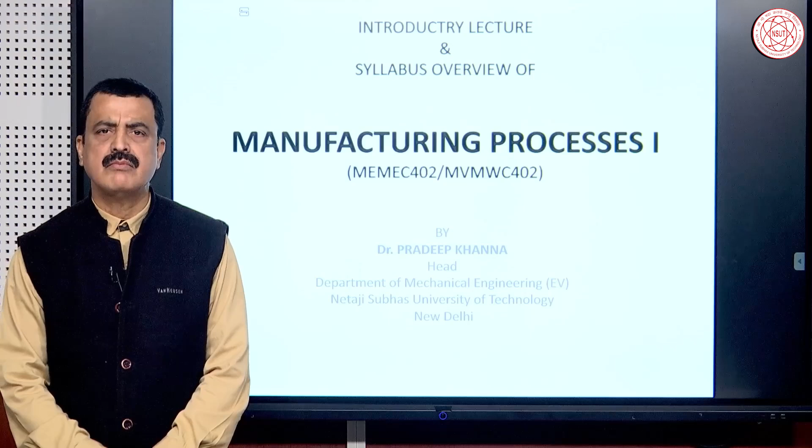But the present syllabus of Manufacturing Processes 1 is focused around these 2 major categories to keep the content relevant and within practical limits from the viewpoint of its effective coverage. So let's have a look at the syllabus structure.

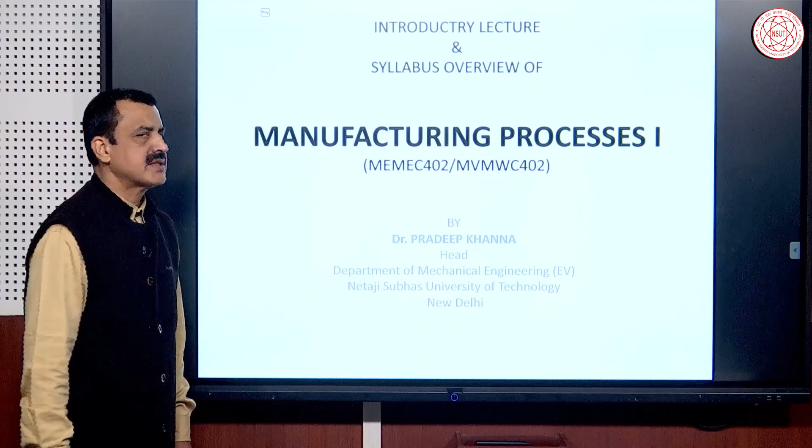So we are discussing Manufacturing Processes 1, which has the codes MEMEC 402 for the students of mechanical engineering and MVMWC 402 for the students of mechanical engineering with specialization in electric vehicles. Now, as far as the course structure goes, we have manufacturing processes, which is divided chiefly into, as discussed, shaping operations and assembly operations.

Shaping operations are those where a desired shape is given to a starting material by a number of operations. These operations are further categorized as casting, powder metallurgy, deformation, and material removal.

Casting refers to a process where molten metal is poured into a mold of desired shape. After solidification of this molten metal, the desired shape is taken out either by opening or breaking the mold.

Then we have powder metallurgy, where the desired shape is given by using fine metal powders which are compressed under very high pressure into a desired mold made up of metal. Then it is given a suitable thermal treatment to achieve the desired shape with sufficient strength and other mechanical properties.

Then we have deformation, where the starting material is plastically deformed to give the desired shape. This can be done either in the cold stage or hot stage, so it is further categorized as cold working or hot working. A very common example is forging.

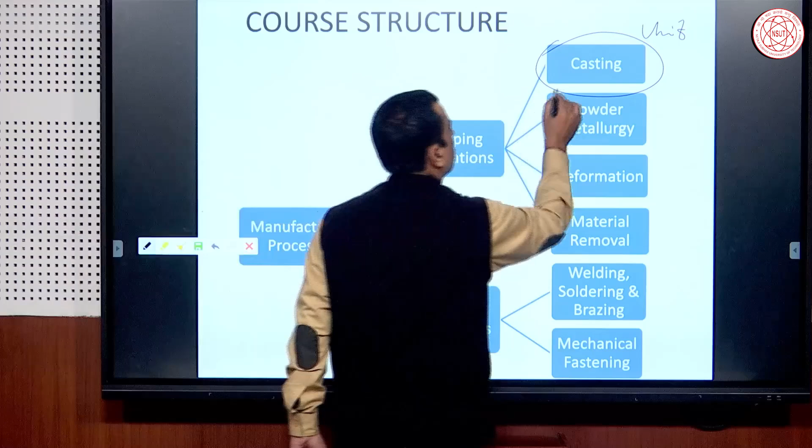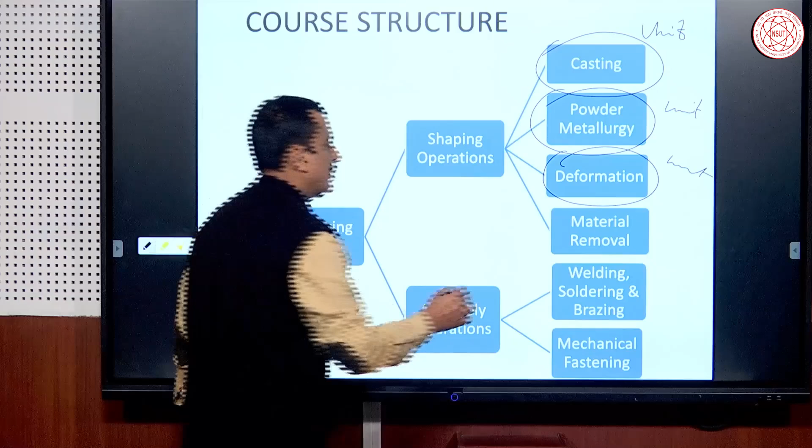Powder metallurgy is another unit. Plastic deformation processes is another unit. Welding, soldering and brazing is another unit, and mechanical fastening, of course. So we have units 1, 2, 3, 4 covering these topics separately, and the 5th unit is on engineering materials.

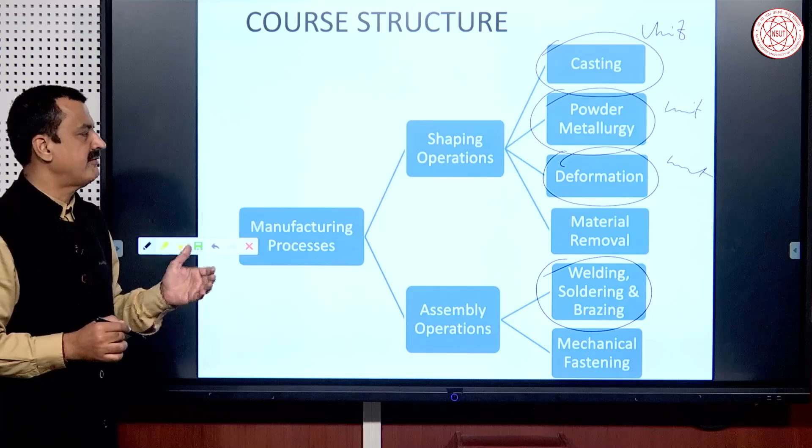The 5th unit is on engineering materials. In fact, unit 1 is engineering materials, unit 2 is casting, unit 3 is powder metallurgy, unit 4 is plastic deformation, and unit 5 is dedicated to welding, soldering and brazing.

The first unit is dedicated to engineering materials, which is rightly so, because the choice of manufacturing process and the process parameters to be selected to make a particular product will depend upon the material out of which the product is to be made. Also, the mechanical properties of the final product depend upon the type of manufacturing process used. So either way, knowledge of engineering materials is necessary and beneficial to students.

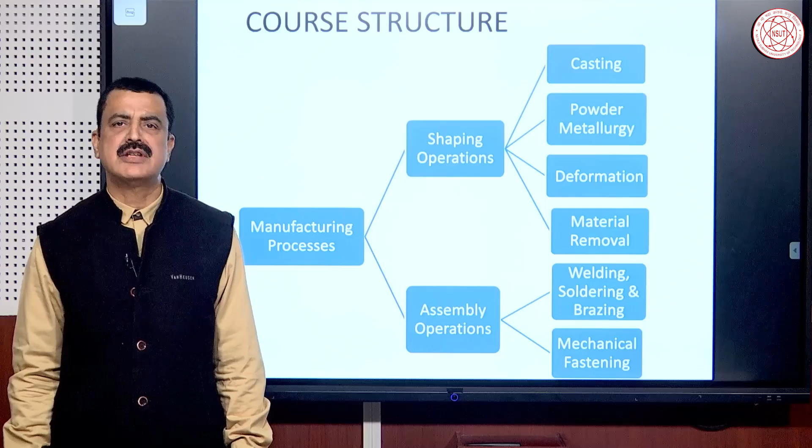The engineering materials are classified into metals, ceramics, polymers and composites. But in the present course, the emphasis is on metals and alloys. These can be divided into two basic groups, namely ferrous materials, which are based on iron, and non-ferrous materials. So unit 1 is dedicated to engineering materials, where we give an overview of ferrous and non-ferrous materials.

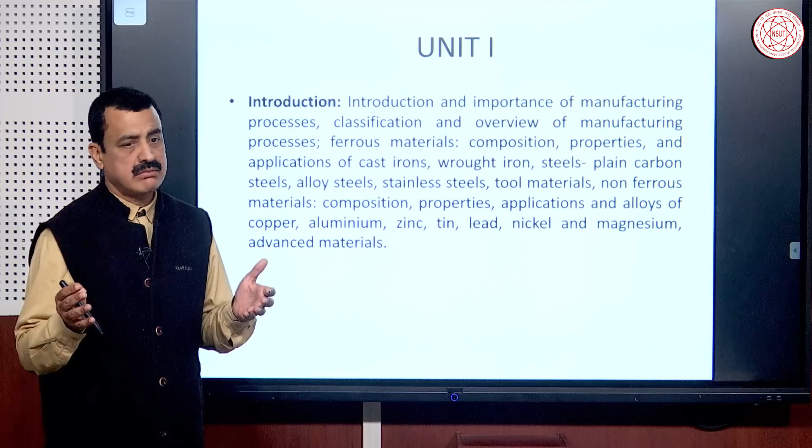In ferrous materials, we'll go through the composition, properties and applications of plain carbon steels, alloy steels, cast irons, stainless steels, and some special steels like tool materials. In non-ferrous materials, we'll discuss the metals and alloys of copper, aluminum, tin, nickel, lead, etc. The aim is to introduce these materials which are very commonly used in general engineering applications.

Now unit 2 is dedicated to casting processes. Casting, as I have already defined, is a process where molten metal is poured into a mold of desired shape, from where after solidification the desired product is taken out.

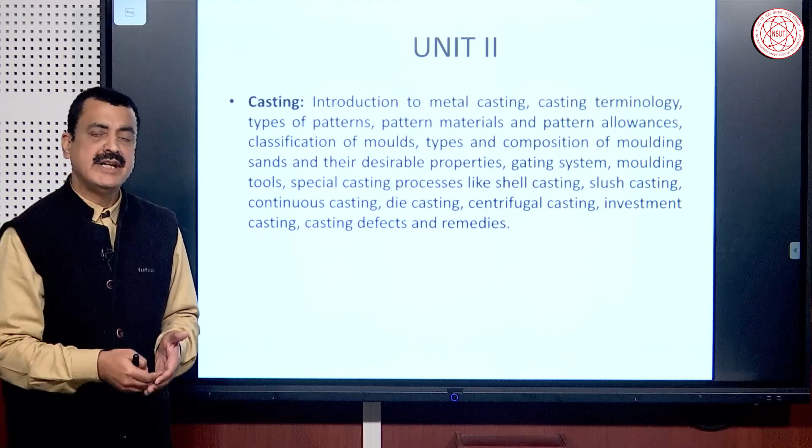Now in this unit, the emphasis is on the types of casting processes. We have broadly divided into sand casting and permanent metal mold casting. Sand castings are those where the mold is created in sand, molding sand. Molding sand plays a very important role because its properties affect the kind of casting and its quality. So we'll study the types of molding sands, its composition, properties and effect on the casting produced.

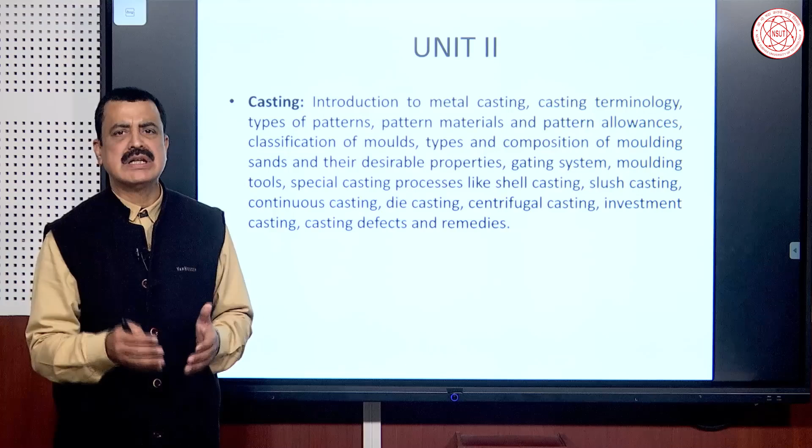Then we'll deal with permanent mold casting, which covers gravity die casting, pressure die casting, low pressure die casting, high pressure die casting, and some special casting processes like investment casting, centrifugal casting, etc. Finally, we'll discuss casting defects and their remedies, which is a very important aspect of castings.

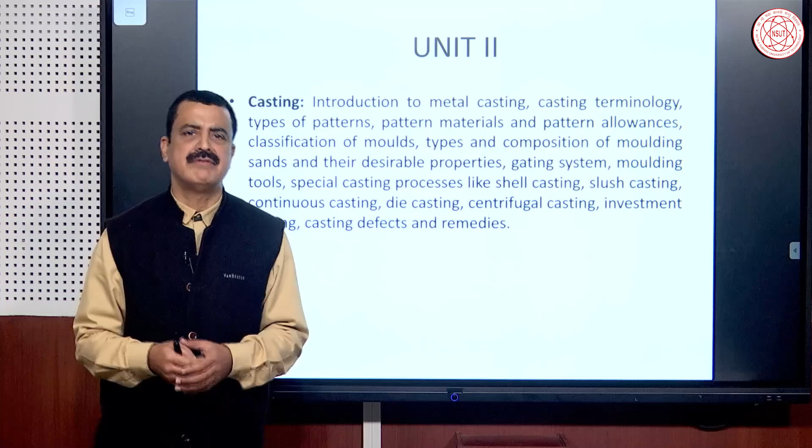Next, unit number 3 is dedicated to metal joining. Here, metal joining means we'll be discussing welding, soldering and brazing.

Welding, as you know, is a process where the metals to be joined are melted at the interface and joined. In this chapter, we will discuss different types of welding processes based on their heat source, like gas welding, arc welding, and solid state welding.

We will go into details of gas welding, the types of flames, the properties of different flames and their applications. Then we go to arc welding processes, where we shall discuss shielded metal arc welding, MIG welding, etc. We will also cover welding consumables, dealing with the types of electrodes and other consumables used while welding.

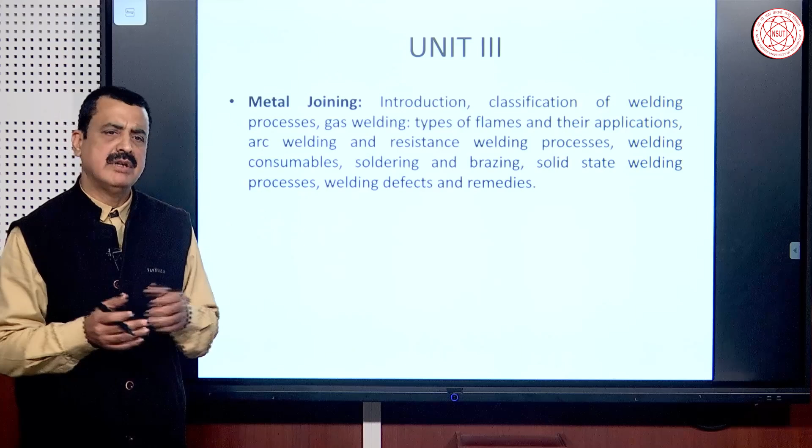Then we will discuss solid state welding, one of the important solid state welding processes being friction stir welding. Finally, we will deal with welding defects and their remedies. So this was unit 3.

Unit 4 is about powder metallurgy. Powder metallurgy, as we discussed, is where fine metal powders are processed by first compressing them into the desired mold and then heating them to a certain temperature so that they acquire the desired properties.

In this case, we shall be discussing the complete process of powder metallurgy, their applications, and their comparison with conventionally produced products.

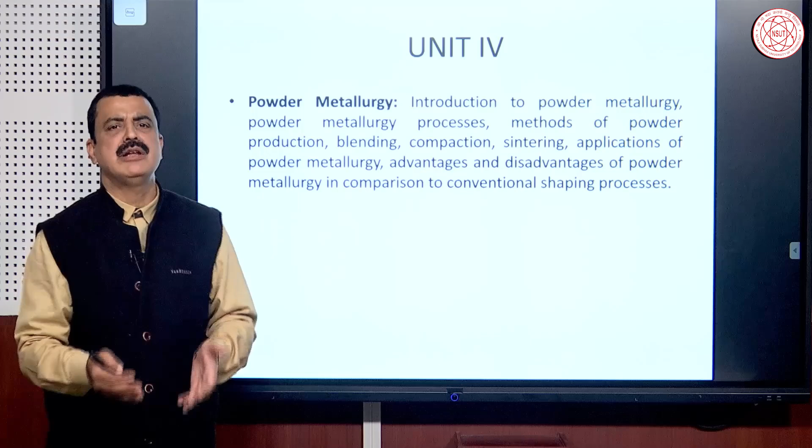Unit 5 is dedicated to the plastic deformation processes, which include rolling, extrusion, forging, etc., where we will be discussing the cold working processes and hot working processes.

Then we have sheet metal work. Sheet metal work is where we deal with metal sheets and the different tools used to give different shapes and make different types of joints with metal sheets of a specific thickness.

Then we have bench work and fitting. This involves the use of hand tools in giving different shapes to the starting material by removing excess material. Remember, this has to be done using hand tools. Here we will look at processes like sawing, chipping, scraping, and thread cutting, both internal and external.

Remember, these two topics are covered in your class workshop practicals also.

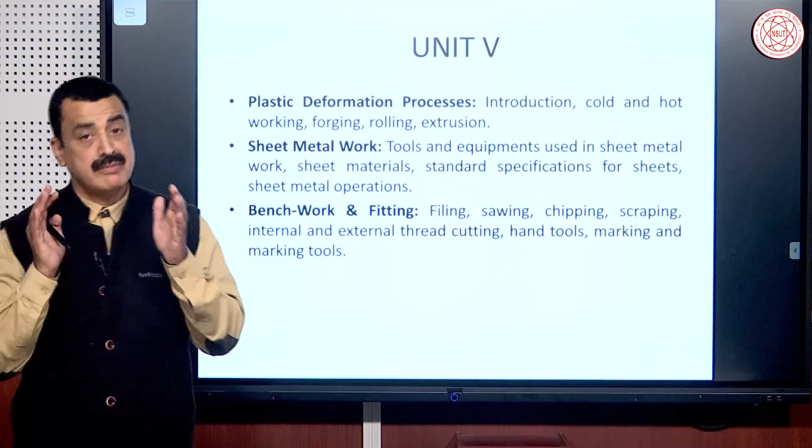These are some of the suggested readings, five suggested readings: first, second and fourth. These three cover comprehensively the manufacturing process 1 and manufacturing processes 2, both of them.

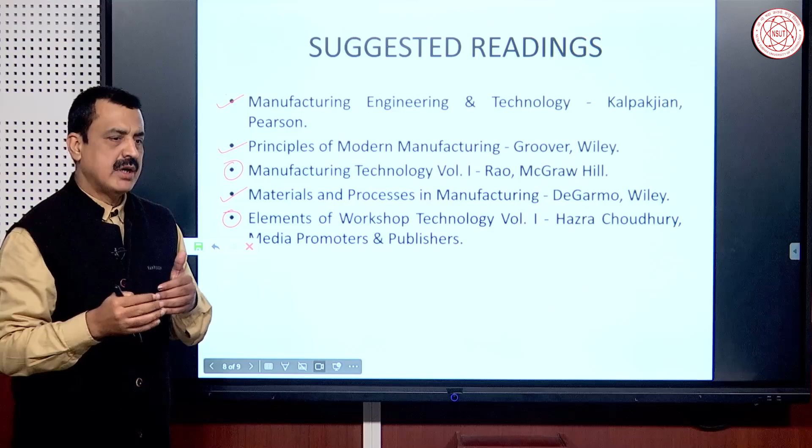Numbers 3 and 5 are available in volume 1. They deal with manufacturing processes only, and if you need a detailed study of the hand tools used in this process, the 5th book is good for that.

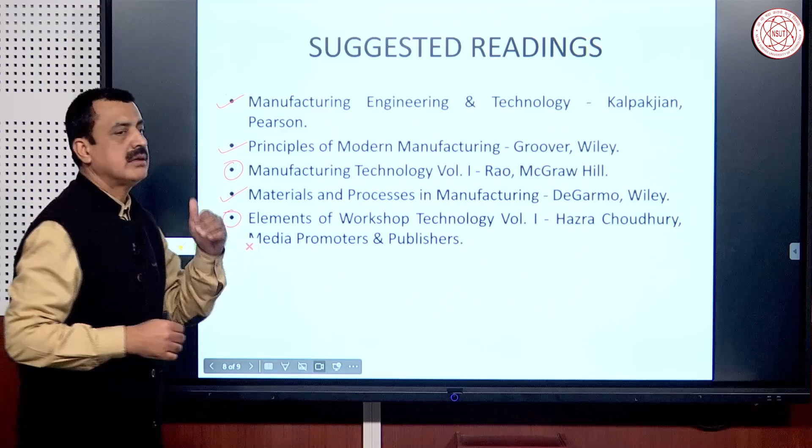The remaining books are good for the pictorial depiction of the different processes. In my opinion, all are good in quality. You can refer to any one of them.

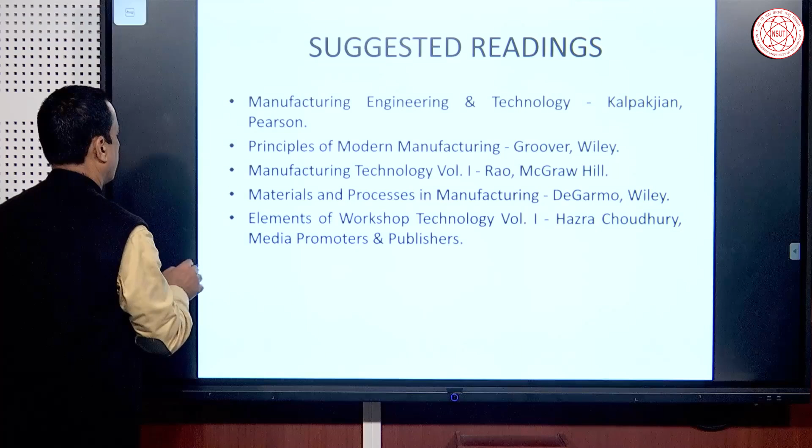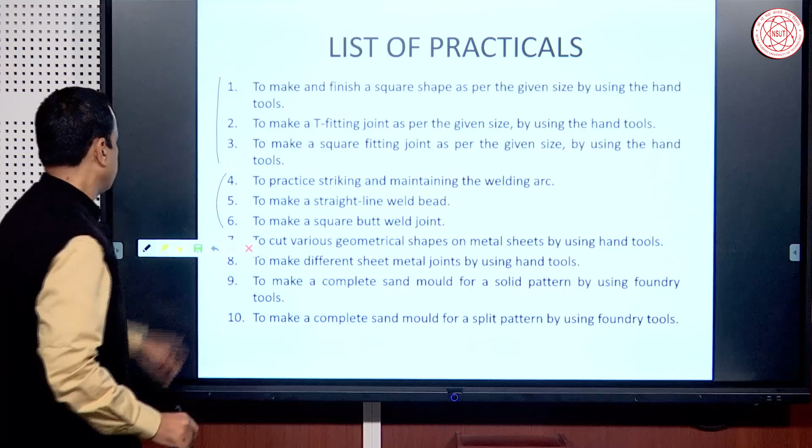Numbers 7 and 8 are for the sheet metal shop, where students are supposed to cut different geometrical shapes on metal sheets and make simple sheet metal joints using hand tools only.

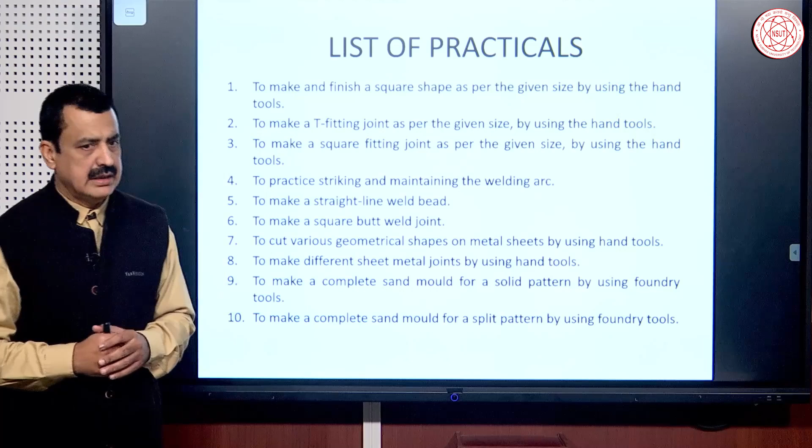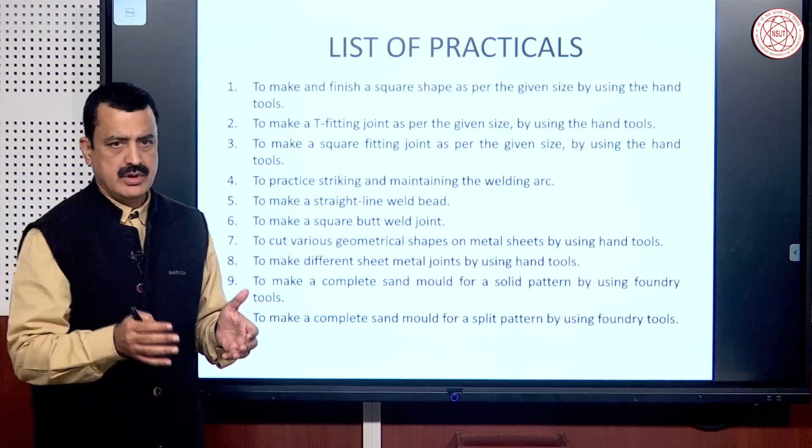9th and 10th are for foundry, related to casting. Here the students will be trained on how to make sand molds for a given shape. So this is about the list of practicals.